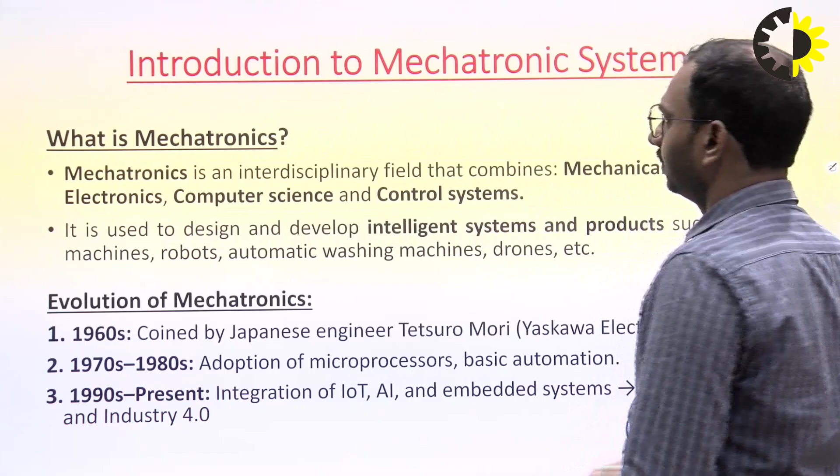Ghaziabad. In this lecture, I will discuss the introduction of mechatronic systems, what is sensors, what is transducers, and hydraulic and pneumatic actuation systems. So first of all, I will discuss what is a mechatronic system, their evolution, advantages, disadvantages, applications, and its classification.

So first of all, I will discuss what is mechatronics. So basically, mechatronics is an interdisciplinary field that combines mechanical engineering, electronics engineering, computer science engineering, and control systems. It is used to design and develop intelligent systems and products such as CNC machines, robots, automatic washing machines, drones, etc.

Then what is the evolution of mechatronics? So in the 1960s, it was coined by Japanese engineer Tetsuro Mori, engineer of Yaskawa Electric. Then in 1970 to 1980s, adoption of microprocessors and basic automation. Then further, 1990s to present, integration of Internet of Things, artificial intelligence, embedded systems, smart machines, and Industry 4.0. So basically, the evolution of mechatronics is divided into three stages: 1960s, 1970 to 1980s, and 1990s to present.

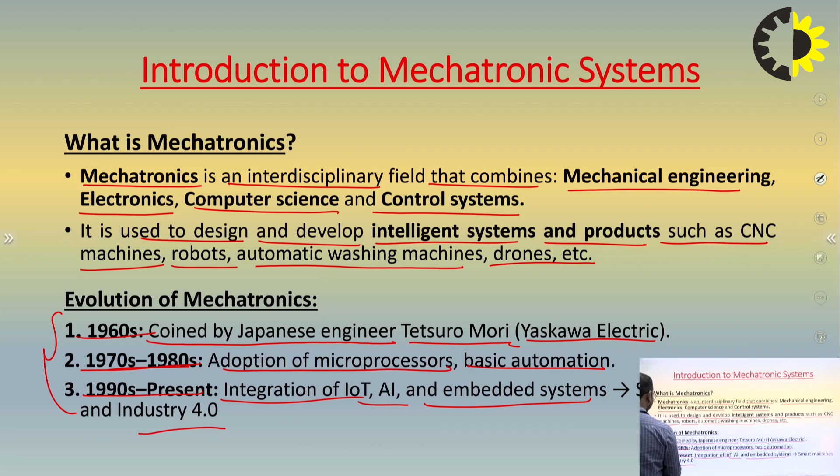Then what is the scope of mechatronics? So the scope of mechatronics is robotics and automation, smart manufacturing, meaning Industry 4.0, medical equipment such as MRI, prosthetics, etc., automotive systems, in automotive systems ABS, anti-lock braking system, cruise control, etc. Consumer electronics: cameras, washing machines.

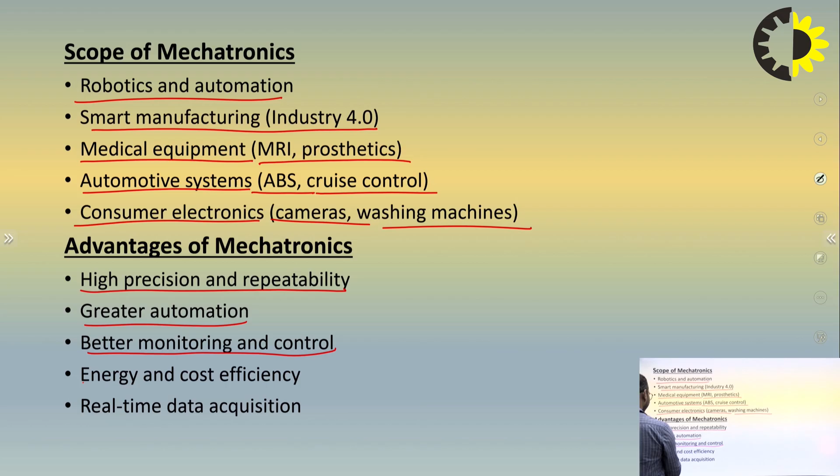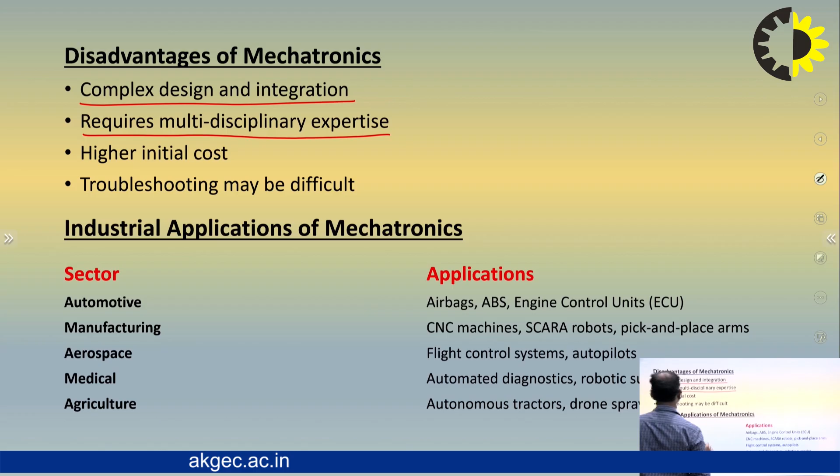Then what are the advantages of mechatronics? The advantages of mechatronics are high precision and repeatability, greater automation, better monitoring and control, energy and cost efficiency, real-time data acquisition. Then what are the disadvantages of mechatronics? The disadvantages are complex design and integration, requires multidisciplinary expertise, higher initial cost, and troubleshooting may be difficult. So these are the disadvantages of any mechatronic system.

What are the industrial applications of mechatronics? These are the sector-wise applications. The first sector is automotive: airbags, ABS, engine control units, etc. In the manufacturing sector: CNC machines, SCARA robots, pick and place arms. In the aerospace sector: flight control systems, autopilots, etc. In the medical sector: automated diagnostics, robotic surgery, etc. And in the agriculture sector: autonomous tractors, drone sprayers, etc. So these are the sector-wise industrial applications of mechatronic systems.

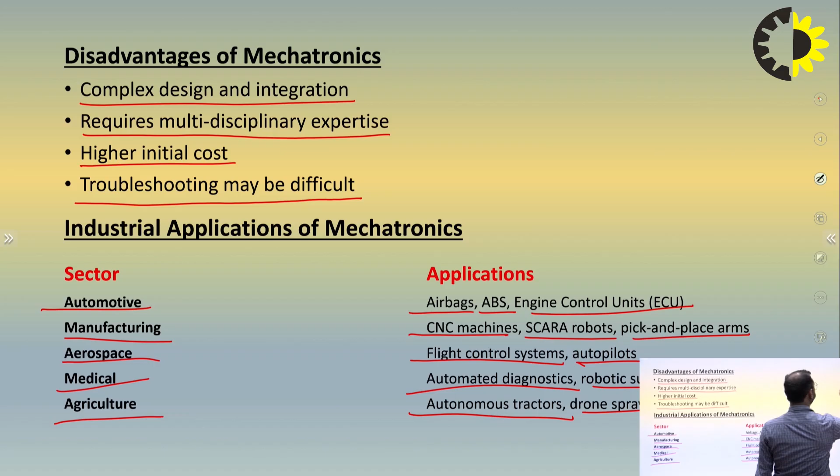Then now I will discuss what is autotronics, bionics, and avionics. These are the subsectors of mechatronics. So basically, autotronics refers to the integration of electronics in automobiles to enhance vehicle performance, safety, comfort, and efficiency. It combines automotive engineering with electronics and control systems. Applications of autotronics are the engine management system, which controls fuel injection, ignition timing and emissions.

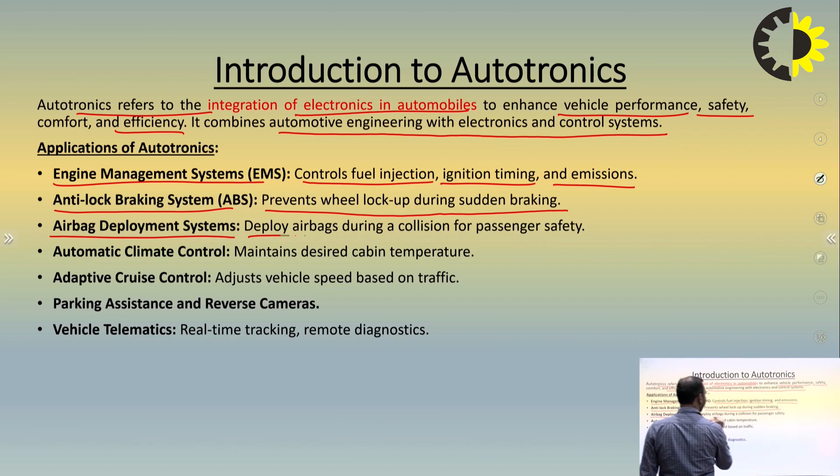Anti-lock braking system, ABS, prevents wheel lockup during sudden braking. Airbag deployment system deploys airbags during a collision for passenger safety. Then automatic climate control maintains the desired cabin temperature. Adaptive cruise control adjusts vehicle speed based on traffic. Parking assistance and reverse cameras, vehicle telematics, real-time tracking, remote diagnostics, etc. So these are the application areas of autotronics. Integration of electronics in automobiles is called autotronics.

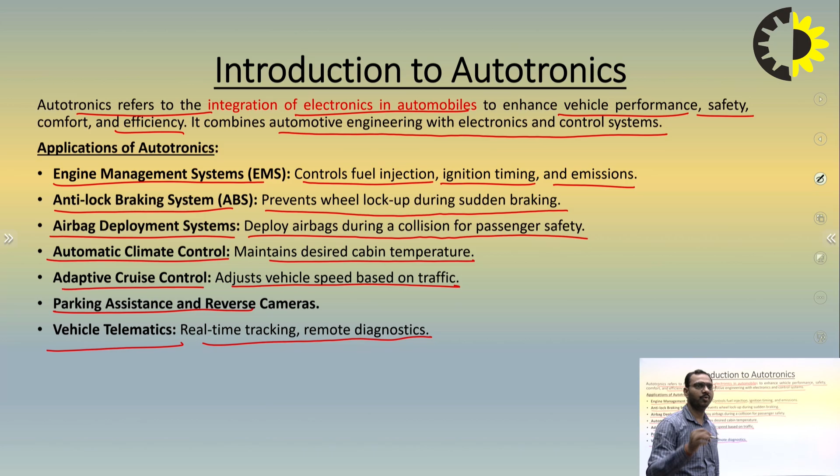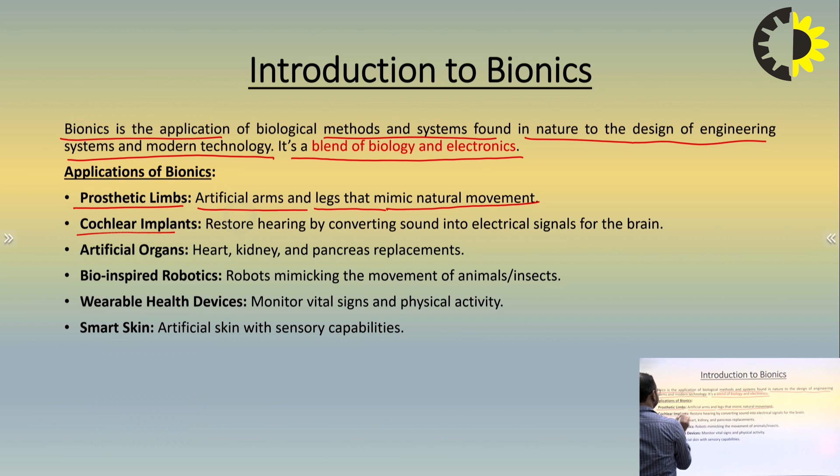The second subsector of mechatronics is bionics. What is bionics? Bionics is the application of biological methods and systems found in nature to the design of engineering systems and modern technology. It's a blend of biology and electronics. What are the applications of bionics? Prosthetic limbs, which include artificial arms and legs that mimic natural movement. Cochlear implants restore hearing by converting sound into electrical signals for the brain.

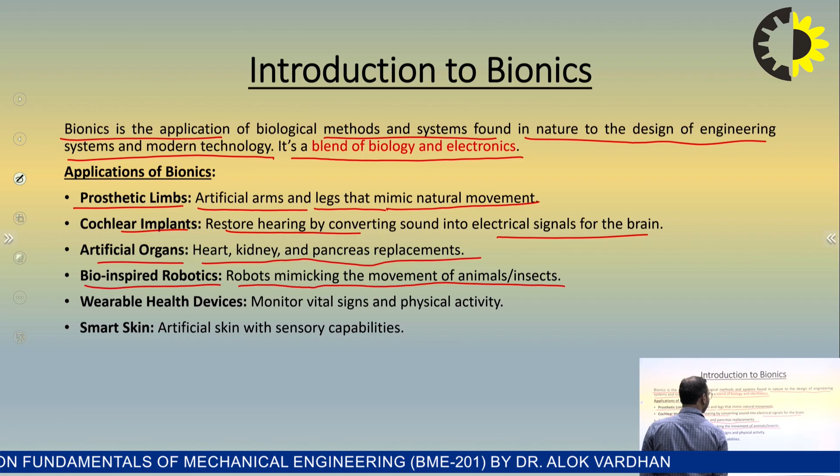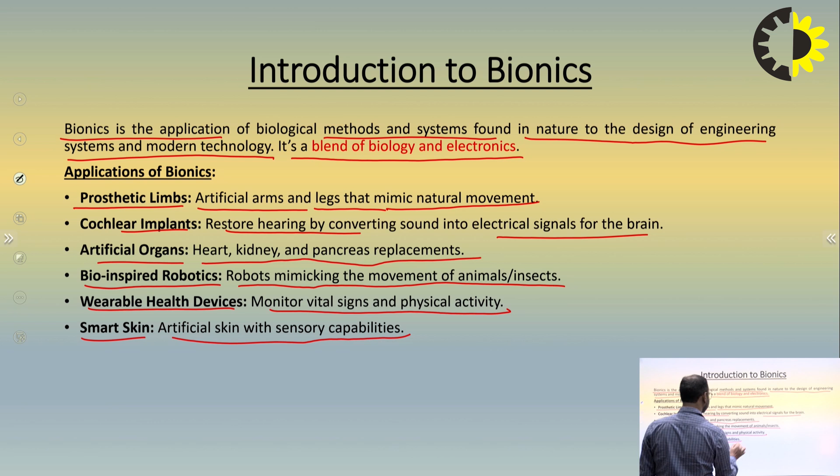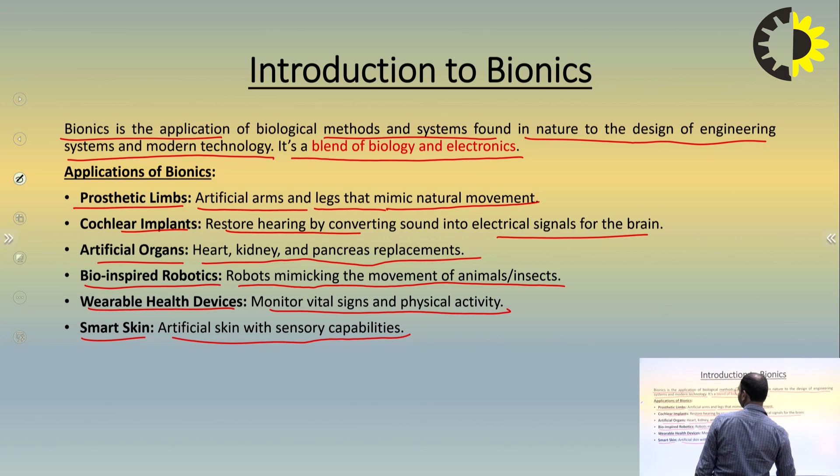Then artificial organs: heart, kidney and pancreas replacement. Bio-inspired robotics: robots mimicking the movement of an animal or insect. Wearable health devices monitor vital signs and physical activity. Smart skin: artificial skin with sensory capability. So these are the applications of bionics. The electronics involved in biology is called bionics.

Then the third subsector of mechatronics is avionics. What is avionics? Avionics refers to the aviation electronic systems used in aircraft, satellites and spacecraft for communication, navigation and flight control. Electronics involved in the aviation field is called avionics. What are the applications of avionics? First one is the flight control system, which manages aircraft stability and control. Then navigation systems: GPS, inertial navigation and radar systems.

Communication systems include radio, satellite and data link communication. Then weather radar detects and displays weather conditions. Autopilot systems control the aircraft without direct pilot input. Cockpit displays: multifunction displays and head-up displays, HUD. Flight management systems assist in route planning and performance monitoring. So these are the applications of avionics.

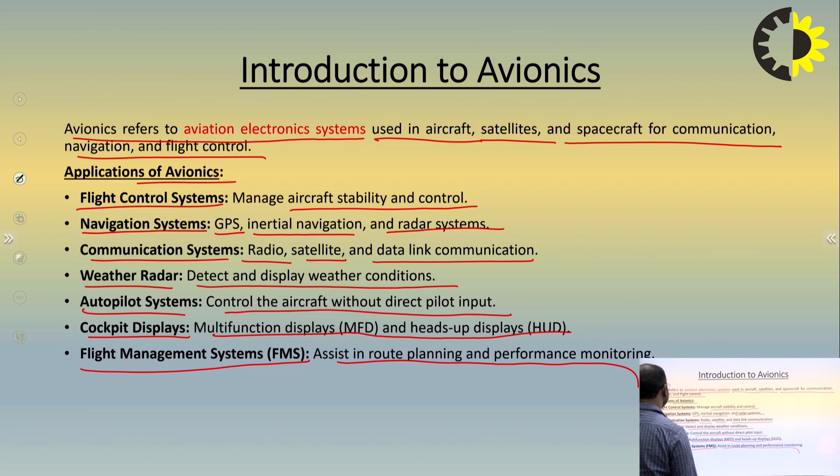Now I will discuss sensors and transducers. So first of all, what is a sensor? A sensor is a device that detects changes in the environment and converts them into a signal, usually an electrical signal. And what is a transducer? A transducer is a device that converts one form of energy into another. All sensors are transducers, but not all transducers are sensors.

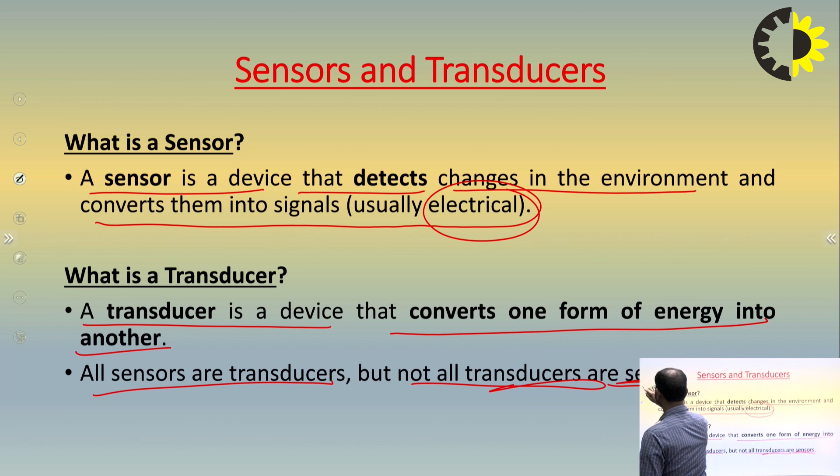Then what are the types of sensors? Now I will explain types of sensors based on what they measure. This is the sensor type, what it measures, and examples. The first one is temperature sensors. It measures heat. Examples of temperature sensors are thermistor and RTD. The second one is the pressure sensor. It measures force per unit area. Examples of pressure sensors are piezoelectric sensors.

Then the third one is the proximity sensor. It measures distance. Examples of proximity sensors are inductive and capacitive sensors. Then the light sensor. It measures light intensity.

Photodiodes and LDR are the examples of light sensors. Then motion sensor. It measures speed and acceleration. Encoders and gyroscope are examples of motion sensors. Then level sensor. It measures fluid level, and an example of a level sensor is the ultrasonic sensor.

Then gas or smoke sensor. It measures chemical concentration, and the examples of gas or smoke sensors are MQ series sensors. Then touch sensor. It measures contact or force, and an example of a touch sensor is the tactile sensor. So these are some sensor types, what they measure and their examples.

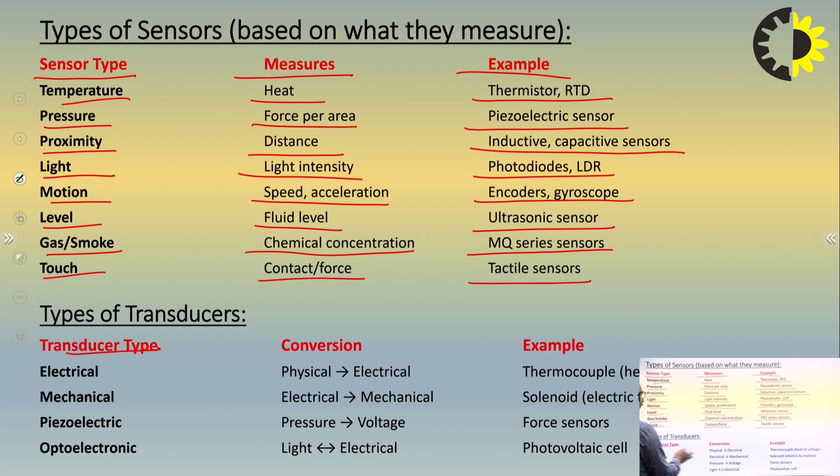Then types of transducer. So basically, what are the types of transducers, what they convert and their examples. The first one is electrical transducer. It converts physical energy into electrical energy. An example of an electrical transducer is the thermocouple, which converts heat to voltage. Then mechanical transducer. It converts electrical energy into mechanical energy, and the example is solenoid, electric to motion.

Then the third transducer is piezoelectric transducer. It converts pressure into voltage, and an example is force sensors. Then optoelectronic. It converts light to electric, and its example is photovoltaic cells. So these are the different types of sensors and transducers and their examples.

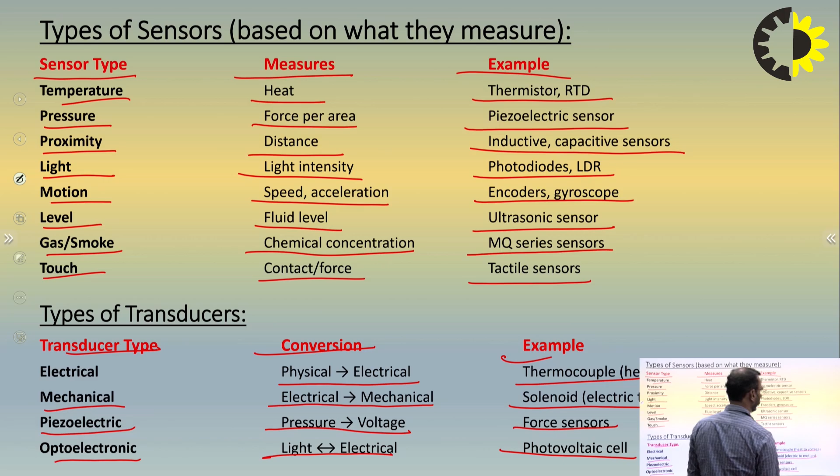Then what are the characteristics of sensor and transducer? The first characteristic, sensitivity. What is sensitivity? Output change per unit input is called sensitivity. Then what is accuracy? Closeness to actual value is called accuracy. Then what is precision? Repeatability of measurement is called precision.

Then range: minimum to maximum measurable values is called range. Then linearity: proportional output across the range is called linearity. Then response time: time to respond to a change in input is called response time. Then hysteresis: output difference for increasing versus decreasing input is called hysteresis. Then drift: change in output with time without input change is called drift. So a sensor or transducer should have these characteristics like sensitivity, accuracy, precision, range, linearity, response time, hysteresis and drift.

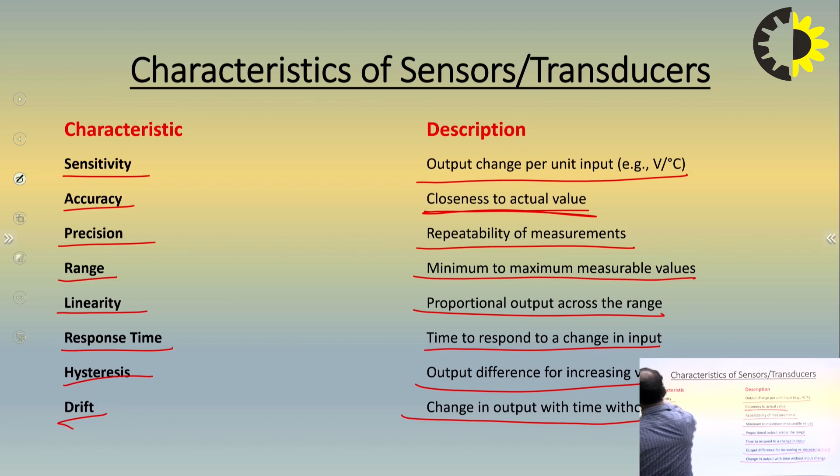Now I will discuss hydraulic and pneumatic actuation system. First of all, what is hydraulic and what is pneumatic. Basically, hydraulic and pneumatic actuation systems use pressurized fluid for generation, transmission and control of power. In hydraulics, with the help of pressurized liquid, which may be mineral oil, we can generate, control and transmit the power. And in pneumatics, with the help of compressed air, we can generate, control and transmit the motion. So first I will discuss hydraulic and pneumatic features.

The working fluid of hydraulics is incompressible fluid, whereas pneumatics uses compressed air. Pressure range in hydraulics is high, up to 700 bar or more; in pneumatics low, 6 to 10 bar. Force generation in hydraulics is high, pneumatics moderate. Speed: hydraulics slower, pneumatics faster. And applications: hydraulics used in heavy duty machinery, whereas pneumatics used in robotics, automation and tools.

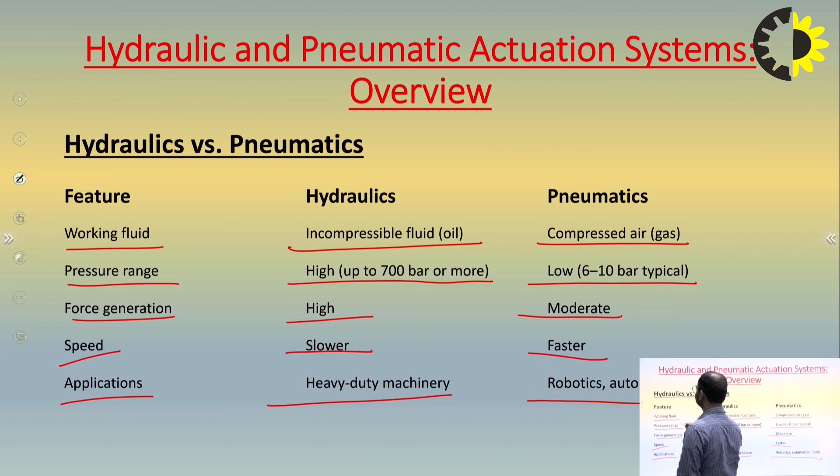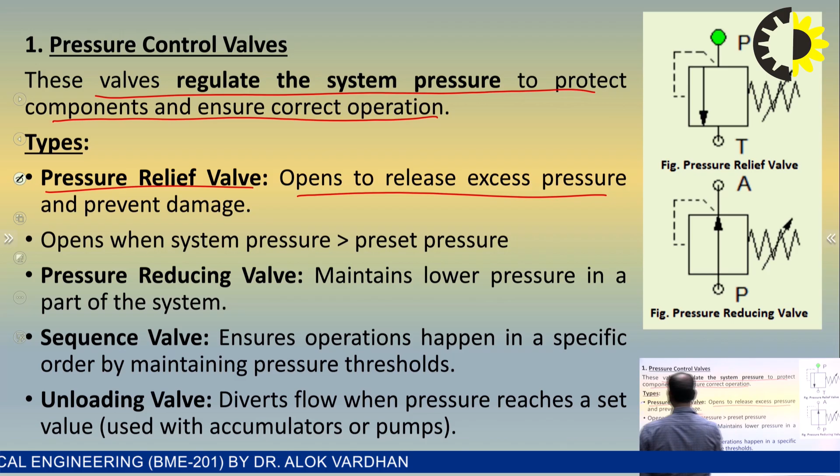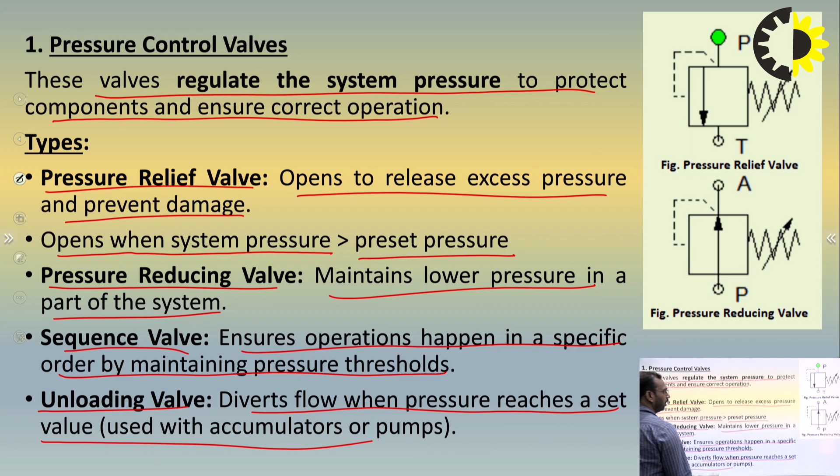Now I will discuss different components of hydraulic and pneumatic systems. The first component is pressure control valve. These valves regulate the system pressure to protect components and ensure correct operation. There are different types. First one is pressure relief valve: opens to release excess pressure and prevent damage, when system pressure is greater than preset pressure. Second one is pressure reducing valve, maintains lower pressure in a part of the system. Then sequence valve, ensures operation happens in a specific order by maintaining pressure threshold. And last one is unloading valve, diverts flow when pressure reaches a set value. This is the symbolic representation of pressure relief valve and pressure reducing valve.

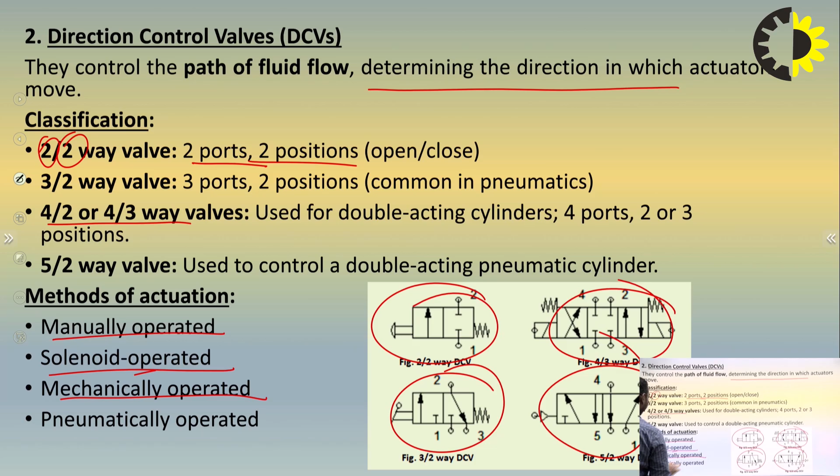Then second component is direction control valve. They control the path of fluid flow, determining the direction in which the actuator moves. It can be classified into 2x2-way, 3x2-way, 4x2-way, or 4x3-way valve. The first digit represents ports and the second digit represents positions. So 2x2 means 2 port 2 position, 3x2 means 3 port 2 position, 4x2 or 4x3 means 4 port 2 or 3 position, and 5x2 means 5 port 2 position. These are the symbolic representations of 2x2-way DCV, 4x3-way DCV, 3x2-way DCV, and 5x2-way DCV. Methods of actuation: manual operated, solenoid operated, mechanically operated, and pneumatically operated.

Then third one is check valve or non-return valve. This is its symbolic representation. A check valve, also called a non-return valve, is a one-way valve that allows fluid, liquid or gas, to flow in one direction and prevents backflow. Different types of check valves are swing check valve, lift check valve, ball check valve. It is used in pumps, pipelines, water systems, and compressed air systems to prevent damage from backflow.

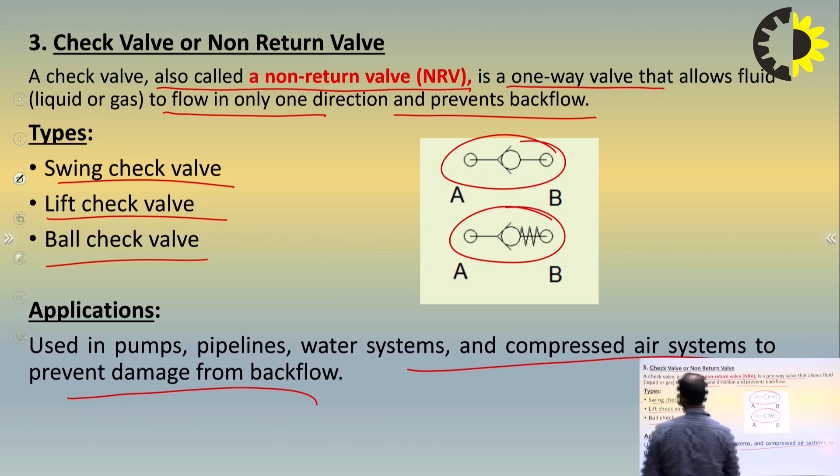Then fourth component is rotary actuator. These actuators convert fluid pressure into rotational motion. Types: hydraulic motor, delivers high torque at slow speed; pneumatic rotary actuator, short rotational angle, for example 90 degree to 180 degree. It is used in robot arms, valve actuation, and industrial clamping devices. This is the symbolic representation of pneumatic rotary actuator, and this is the symbolic representation of hydraulic motors.

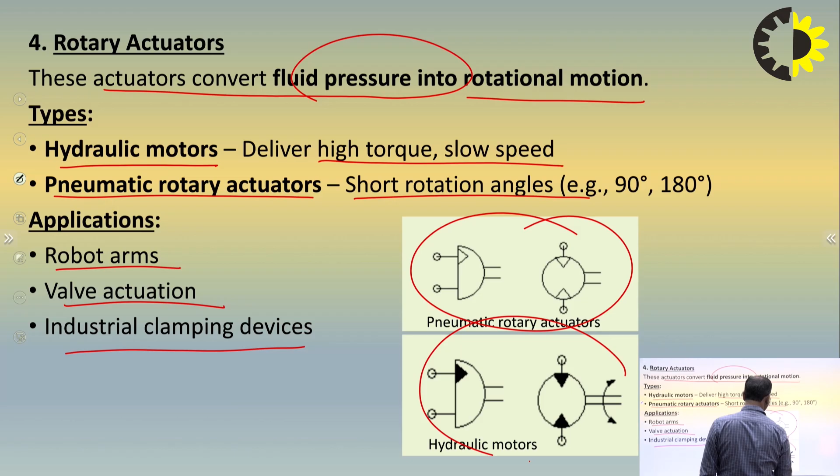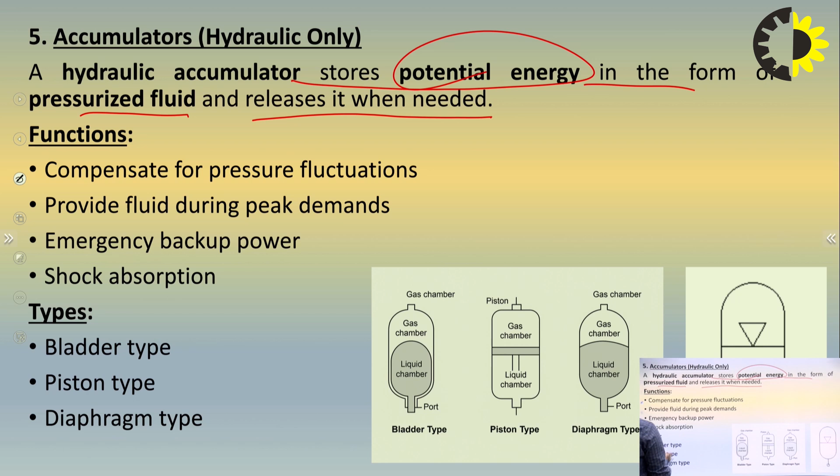Then fifth one is accumulators. A hydraulic accumulator stores potential energy in the form of pressurized fluid and releases it when needed. There are different types of hydraulic accumulator: bladder type, piston type, and diaphragm type. This is the diagram of bladder type, piston type, and diaphragm type, and this is the symbolic representation of hydraulic accumulator. The main functions of a hydraulic accumulator are: it compensates for pressure fluctuation, provides fluid during peak demand, emergency backup power, and shock absorption.